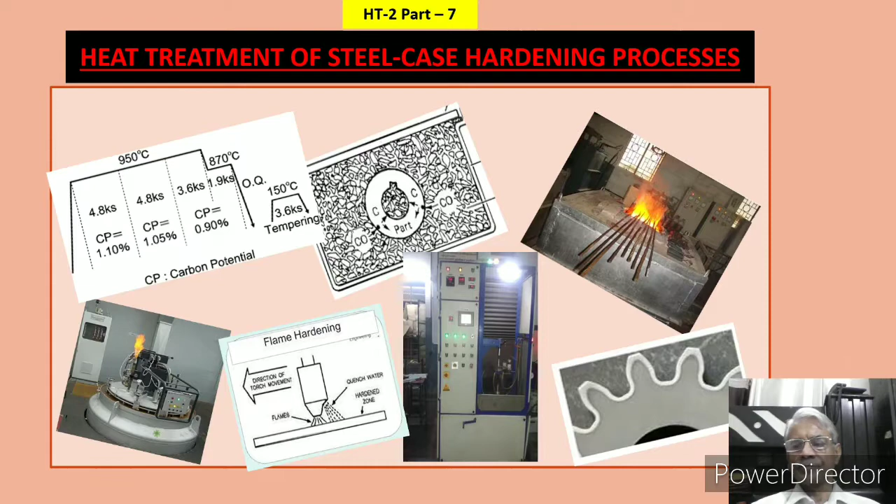So this program is on flame hardening. This is heat treatment series 2, part 7, and this program is on a surface hardening treatment that is also known as the flame hardening process. So I'll be dealing with this flame hardening process. Okay, so let's see what it contains.

The content is, first of all, the flashback. I have already produced heat treatment series 1, wherein there are 8 parts. The details are written here. You can go through this. Okay, and the current series is heat treatment series 2, wherein I have already produced 6 parts, and the 7th part I am now covering, that is on flame hardening.

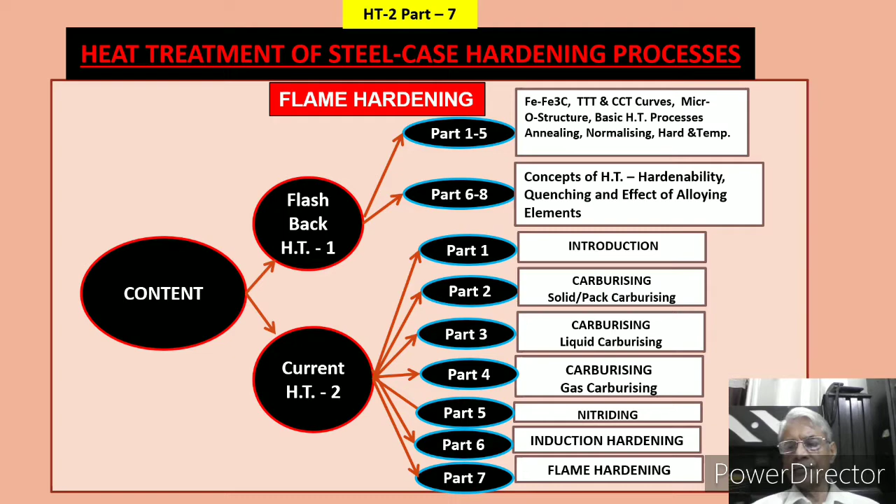Coverage, what it covers. First of all, input of steel. What type of steel is used for this flame hardening process? Here I have already mentioned medium carbon steel or alloy steels are generally used for flame hardening. If you want to know the details of the steel used, you can refer IS 3930-1994, that is the specification for flame and induction hardening steel. This mentions all the steels which are applicable for flame hardening and induction hardening.

Okay, the second one is the flame hardening process that I will be describing. Third one is advantages and disadvantages. And the fourth one is applications where this flame hardening process is used. So I'll be covering all these things in this particular part 7. So let's move further.

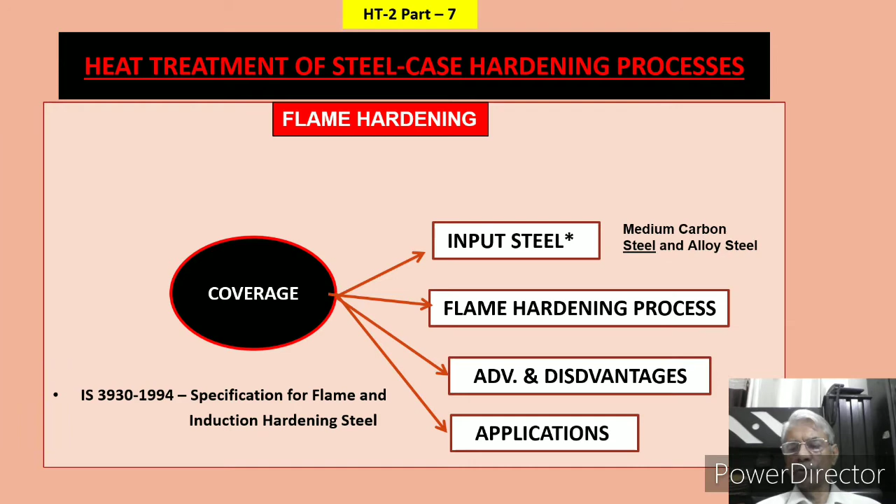So first of all, definition of flame hardening. Flame hardening is a surface hardening process in which a steel part is rapidly heated above austenitizing temperature with the help of a flame, that is, it could be an oxy-acetylene torch or other gases, and then quenched by water spray to achieve a desired surface hardness.

Means basically in this case you heat the steel part on the surface with the help of this flame, which is generally oxy-acetylene plus other gases also. You heat it to austenitizing temperature, red hot temperature, and after that you quench simultaneously by water, and you get a very good surface hardness. So whatever surface hardness you desire, you get it, but before that you have to heat it with the help of the oxy-acetylene flame. That is why this process is called the flame hardening process.

Flame hardening is used to develop high hardness, which results in high surface wear resistance. This also improves bending and torsional strength and fatigue life of the part, and the core of the part remains soft. So the core remains unaffected.

In this case, when you are heating it, it develops a very high hardness, which results in high surface wear resistance. And this high surface resistance improves bending and torsional strength and also fatigue life of the part. But the core of the part remains unaffected. That remains soft. There is no effect on the core. It is only the surface which is heated up, and then it is quenched to get a desired surface hardness.

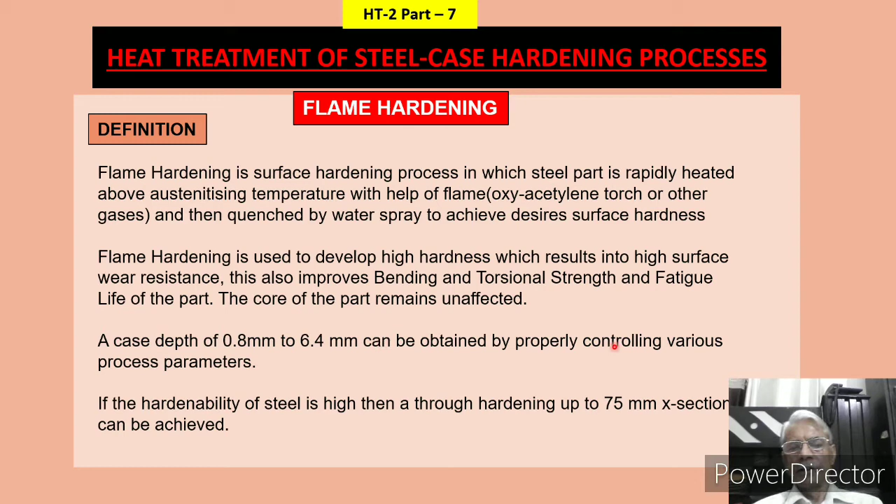What is this process? The process is that, see, this is a particular job which is to be flame hardened, and this is the surface area. Now in this case, the surface is heated with the help of this flame. A gas chamber is there wherein you have an oxy-acetylene torch or maybe some other gases also, depending upon the use, and then you heat it, and simultaneously you quench it also. So this is a quenching arrangement, this is a heating arrangement, and then you move from here to here.

So as long as you are going to heat it and quench it, the surface becomes very hard. See, this area is a hard surface and this is going through. So this way you can go through the entire surface and harden it. So in this particular case, the spray of water is here quenching, and then this is the hardened surface. Now this particular core area remains soft, it doesn't get hard, because there is no heating effect. Heating effect is only up to this level.

And the achievable case depth with this is 0.8 to 6.4 millimeter, and in this case the surface hardness which can be achieved is 55 to 60 HRC. So depending upon the composition of the steel, whether it is a highly alloyed steel or medium carbon steel, you can achieve a hardness up to 55 to 60 HRC. So this is how this process is.

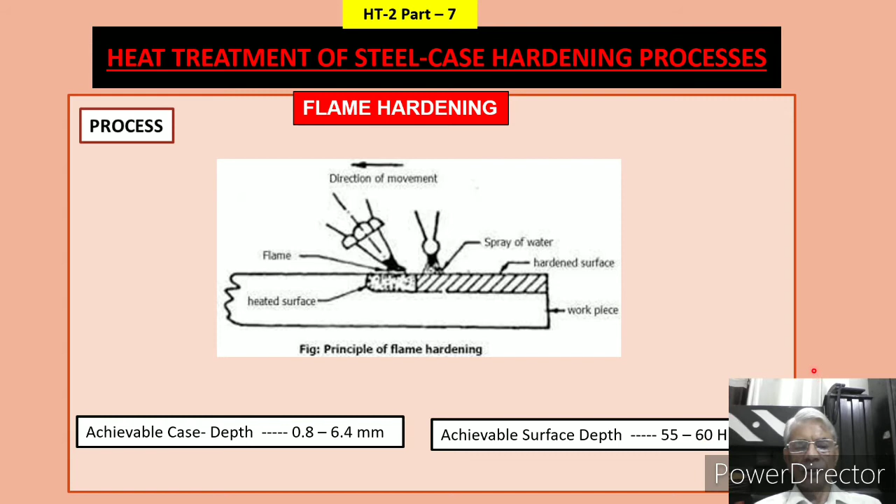Now, what are the different methods? First of all, there are 4 methods: stationary or spot method, progressive method, spinning method, and then combination of progressive and spinning. In this case, if a very small area is to be hardened, then the stationary or spot process is used, where this particular spot is heated with the help of this oxy-acetylene torch, and then it is quenched also. So you get a localized surface hardness, only up to this area. That is why it is known as stationary or spot method.

In the progressive method, see, this is the arrangement wherein there is a gas chamber where oxy-acetylene gas and other things are being used, and this is a chamber for the water quenching arrangement. The part is heated on the surface here, and simultaneously it is quenched also. So as soon as the part gets heated up, it is quenched, and you move from here to here. That is why it is known as a progressive method.

In case of a spinning method, something like this hollow cylinder is there. In this case, this part is rotated like this, spinning is there, and these are the four oxy-acetylene burners, wherein this is getting heated up, and these are the pipes through which this is getting quenched.

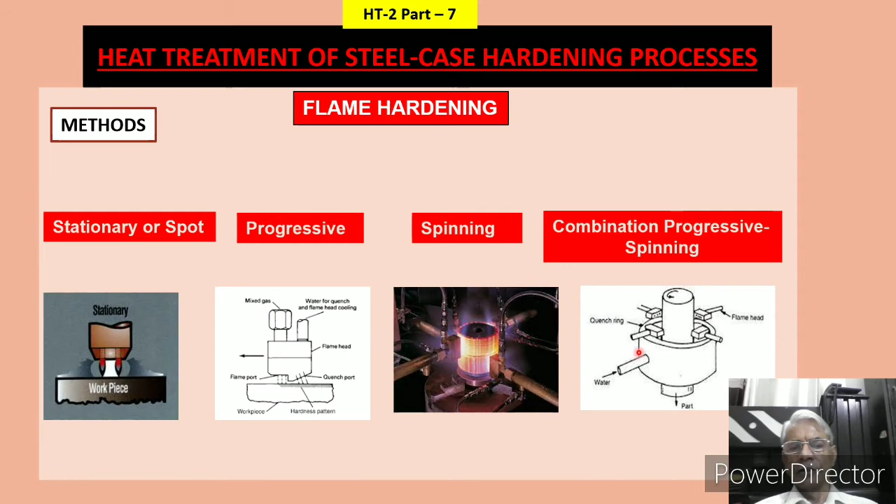Factors which influence flame hardening. What are the factors that are influencing quality of flame hardening? First of all, type of fuel being used. This is the first thing which is most important, whether you are using oxy-acetylene or oxy-propane. Depending upon the situation, you have to select a proper oxy-acetylene or oxy-propane gas combination.

And the second one is design of the flame head. It is basically to concentrate the heat at the particular point. So this has to be a very concentrated effort, so that particular area is heated up. So design is a very important part, so that you heat the specific area.

The third one is duration of heating, to what extent you are heating it. Sometimes if you overheat it, then some scaling may occur. So you have to avoid this overheating. So that's also there. So you have to avoid overheating during this process.

Hardenability of the steel part. Again, in the previous slide I told you, if the steel hardenability is good, you can go up to a great case depth in flame hardening. So this is also important, what is the hardenability of that part. Depending upon the hardenability of the part or the composition of the part, you can achieve different case depth and surface hardness also.

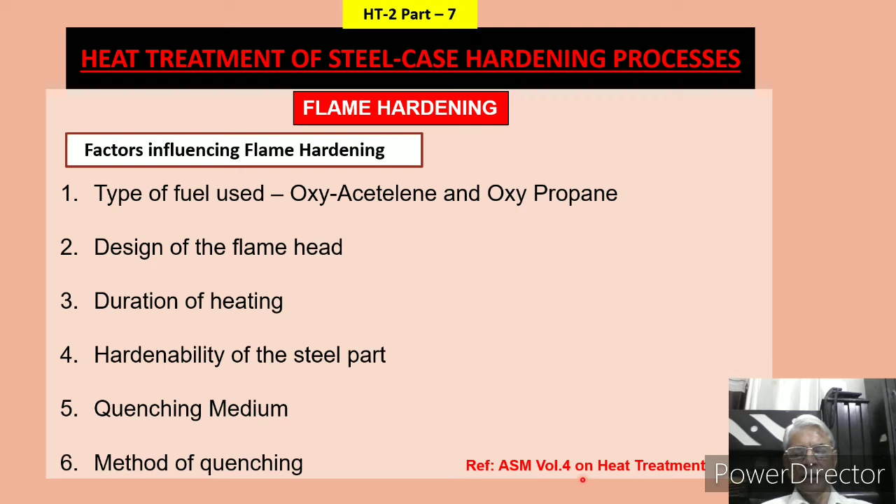All these things have various process variables which we have to control during flame hardening. So if you want to know in detail about these things, you have to refer this particular volume 4 on heat treatment of ASM, American Society of Metals.

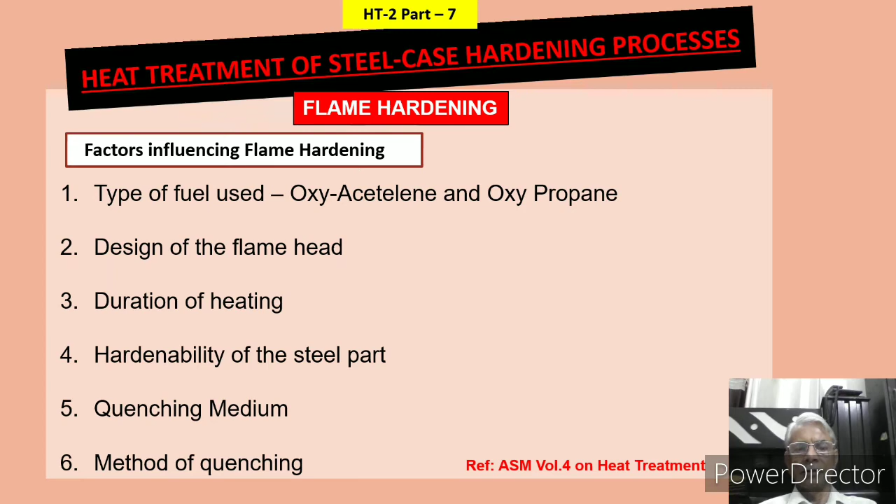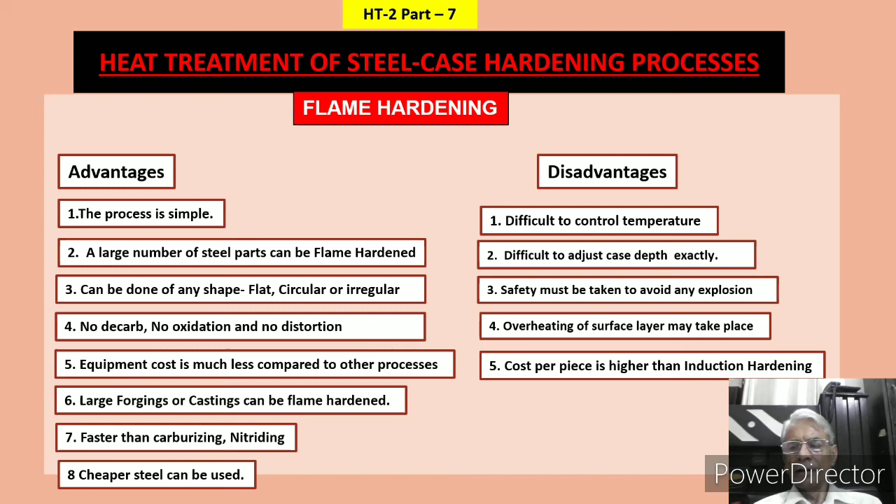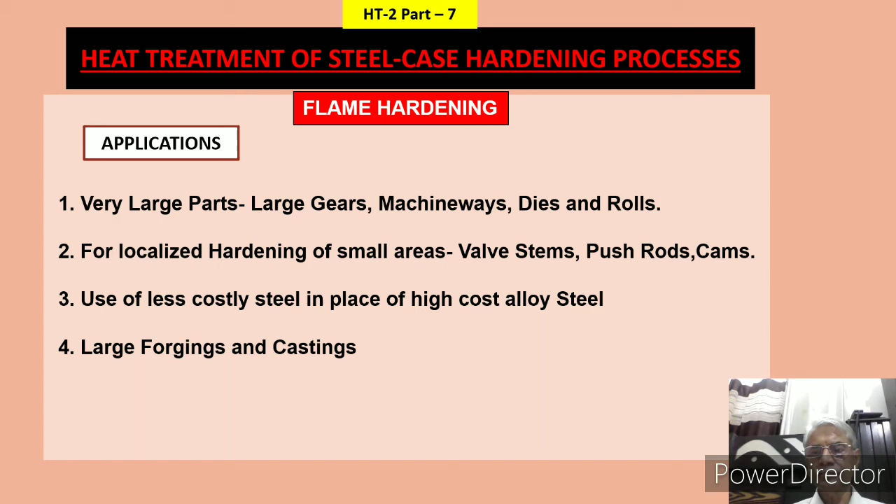So till now I have covered flame hardening. What is flame hardening? How is it done? What are the four methods by which you can do flame hardening? And what is the system? How this process occurs, how the part is heated with the help of the flame, austenitized, and then quenched. Okay, so all these things I have covered.

Then what are the various factors which influence the quality of flame hardening? That also I have explained. If you want to go in detail, then you have to refer ASM volume 4 on heat treatment for knowing the various details. And then what are the advantages and disadvantages of this process? And the last one is application of this flame hardening process.